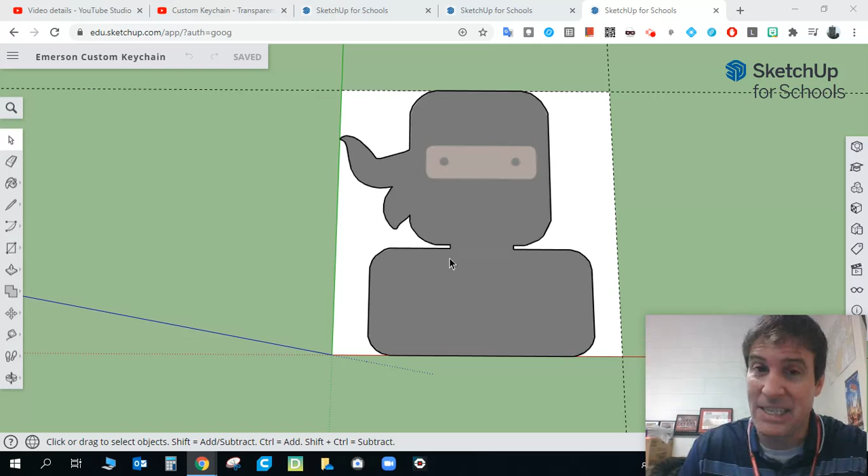So I'm going to show you a little bit here. I'm going to scroll in. This isn't something you need to do, I just want to make sure you see it. So I'm zooming in to show you we've done the push-pull and we're looking at three-dimensional geometry. Because we're looking at three-dimensional geometry, that puts us in a place where we can actually start to talk about and look at and worry about the inside of the object.

So the next step is to do all the outlines of anything internal, all the internal geometry. Now in this 3D print, there's really not a whole lot going on here. Mostly we just got that little eye cut out and then the two eyes.

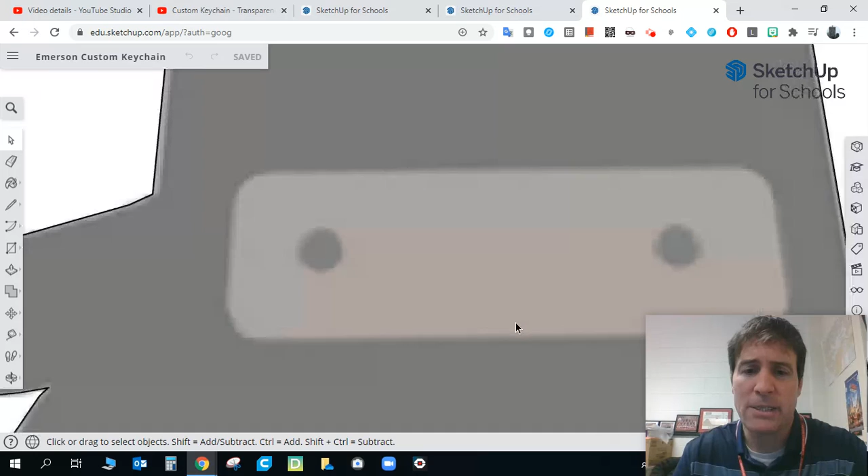So what I'm going to do is exactly what I said. I'm going to get my pencil tool and trace around the outside of all this internal geometry. Again, you can see I'm using my zoom tool to zoom in a little bit, and I'll use the pan tool to move my placement a little bit. Then I'm going to continue tracing around the outside.

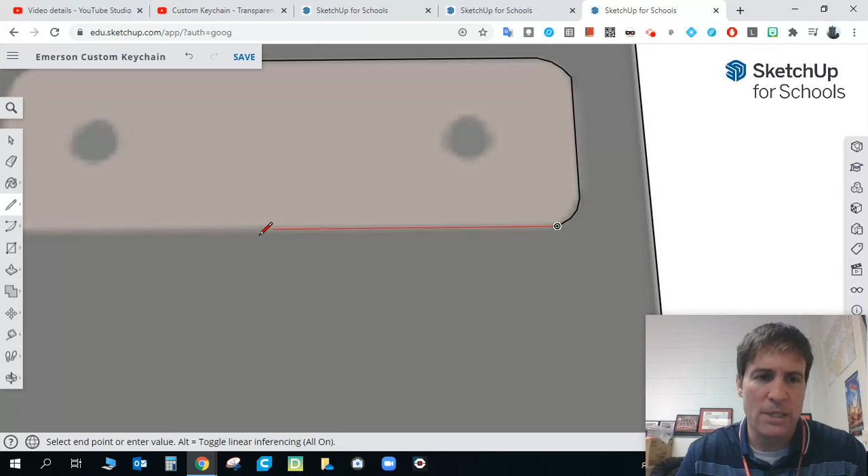So I need to trace all the internal geometry I have in this object—everything I want to appear, everything I want to be part of my final keychain, needs to be traced here in this process. Again, you see I'm getting a blue line. I've got to make sure I avoid that, just adjust my location a little bit, and I'm able to avoid it. So I'm going to do some more tracing here.

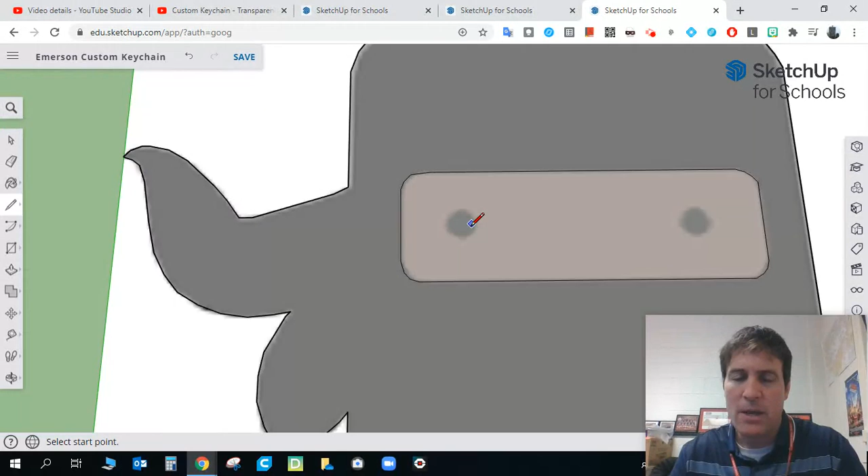I know this is fun watching me trace, but there we go. So now I've got that little eye cut out in his outfit done, and I'm going to go in for the eyes. For me, the eyes are pretty much circular, so I'm going to do my best job. I'm actually going to use the circle tool and try to find the exact center, then get that circle to match up as well as I can. I think that's pretty good.

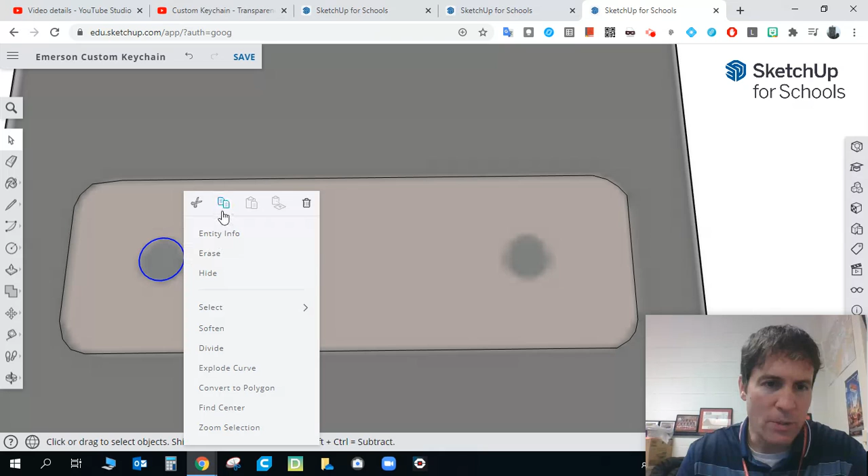Rather than doing that again, this time I'm going to click on this one, copy it, and then paste it over here. You can see it's right there, and I'm going to try to make sure I match it up. You can see I drag that line—I have to move it here to get it matched up as well as I can. Then I'm going to try to get it right there and see if I can match that up again with this guy. Actually, I think I'm in pretty good shape, so there we go.

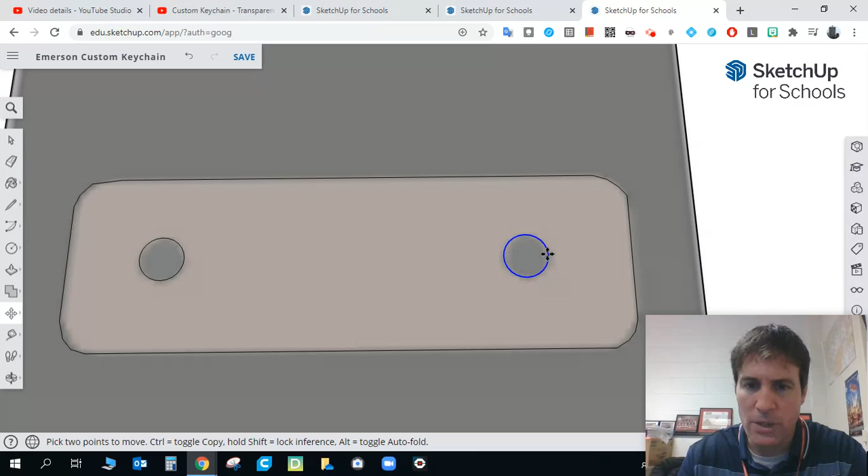So now I've got my two eyes and my eye cut out, and that's really it. I've traced all the internal geometry I want to, and I'm ready to do the next step.

Now there's a couple things I want to point out that are pretty important, so we're going to spend a little more time in this video. If you've already traced all your internal geometry, you're in good shape. We'll talk about that next step in a minute, but here's some things to think about.

In order for a 3D printer to print something, it has to be three-dimensional, right? And this is just a line that we've drawn on the top of the object, so that's not going to do anything. If we want the mouth to show up, then we have to do the same thing we've done for everything else, which is trace around the outside of that mouth, which is going to be considerably more work than just doing what we just did.

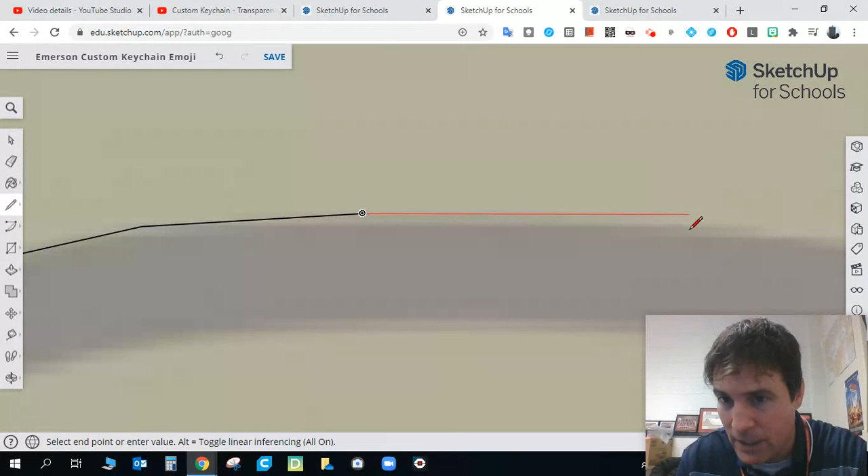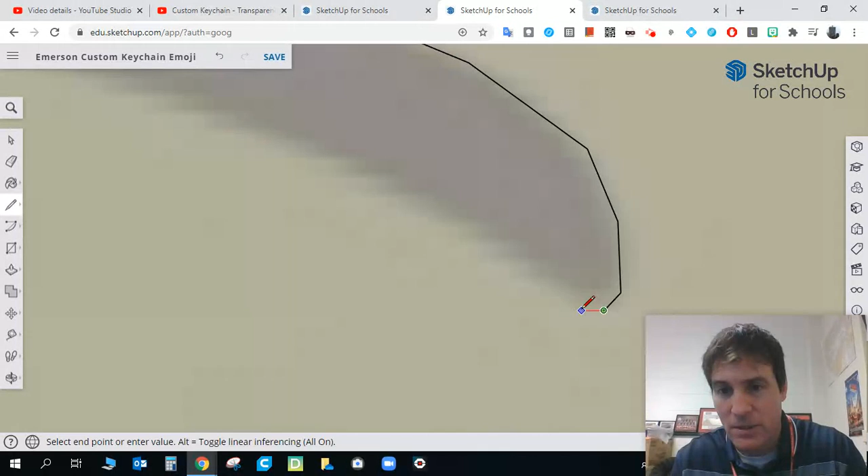In fact, it's making me sweat a little bit, I've got to work to get these lines where I want them to be. This is obviously much more work than just drawing 5 little line segments that made that frowny face line appear. But in order to make this 3D print, that's the issue - it's not that we can't make the shape happen, it's that we want to make it so that this shape can actually 3D print.

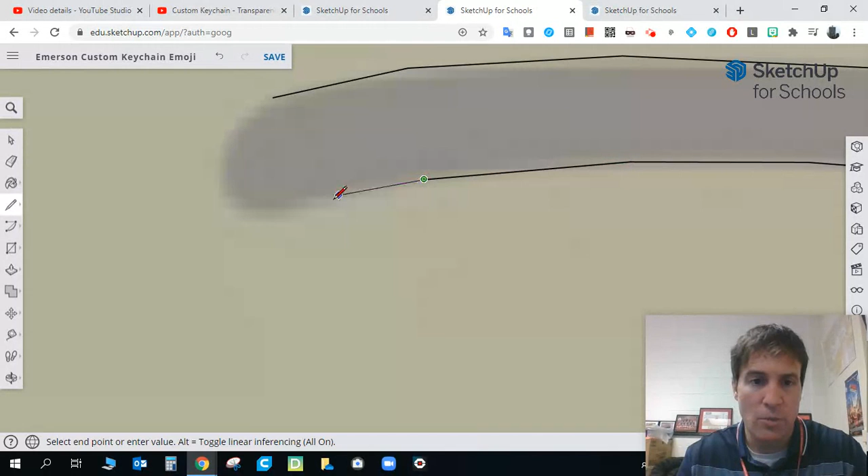In order to make it 3D print, we have to make it into a three-dimensional object, and for it to be a three-dimensional object, it has to be able to be push-pulled. So what I'm doing right now is trying to get to the point where I have basically a closed figure that I can then push-pull into a three-dimensional shape. Again, just trace it around the outside - I'm trying to do this as quickly as possible so you can stop being bothered by my nonsense. But there we go, we've got a closed figure now.

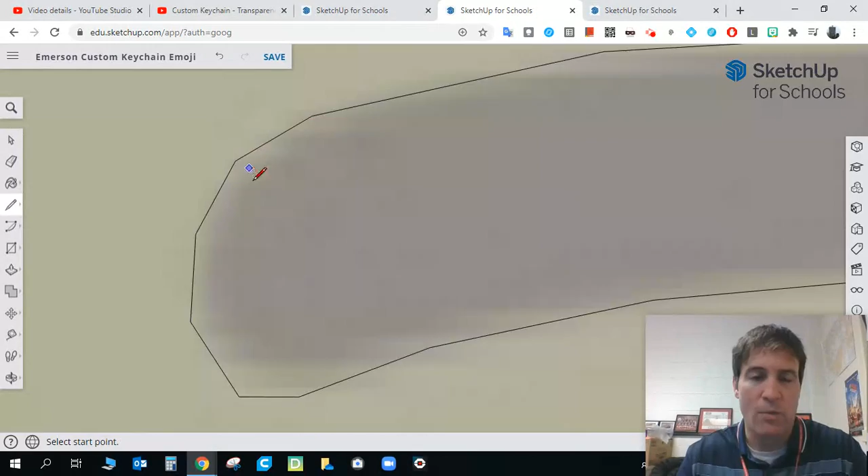If I grab the push-pull tool, you can see now I can actually push-pull that object, which is what this whole exercise was all about - making sure I had a closed figure that I would be able to push-pull. You can see each of these closed regions are closed figures that I can push-pull, which means I can make them three-dimensional, which means they'll 3D print.

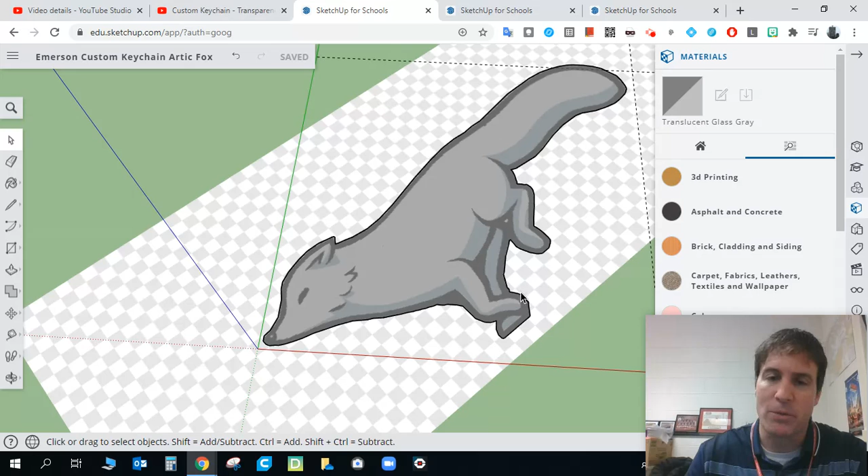I'll show you another example of the same kind of thing. I've seen some people doing some animals. Here's an example - like some kids would do that little separation between tail and, I don't know, rump. They'd try and do a line here. Well, here's the thing - that line actually doesn't do anything unless you make that line three-dimensional.

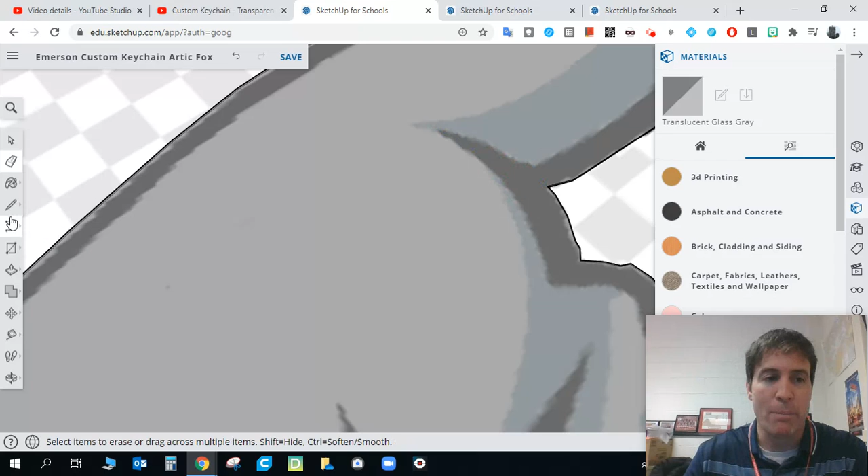So you're going to need to think about whether or not you want to make that separation happen. If you want that separation to happen, then you're going to need to make it a closed figure that you can make three-dimensional, right? So what I'm doing right now is doing just that. Now, oopsies, let me undo that one.

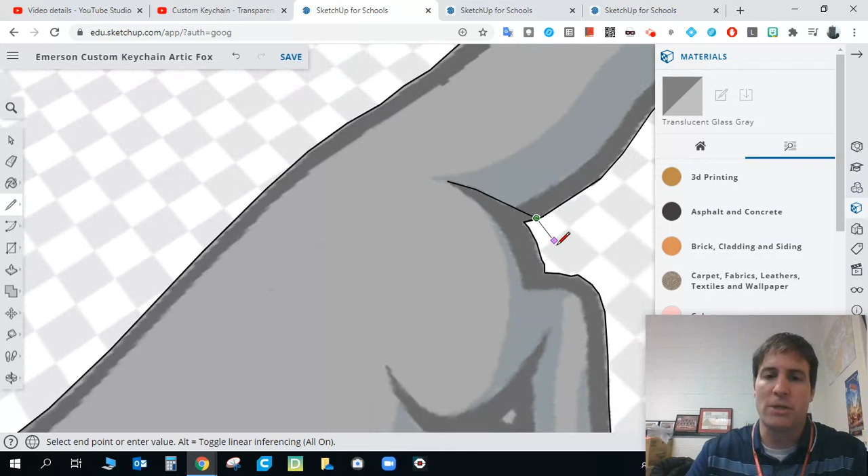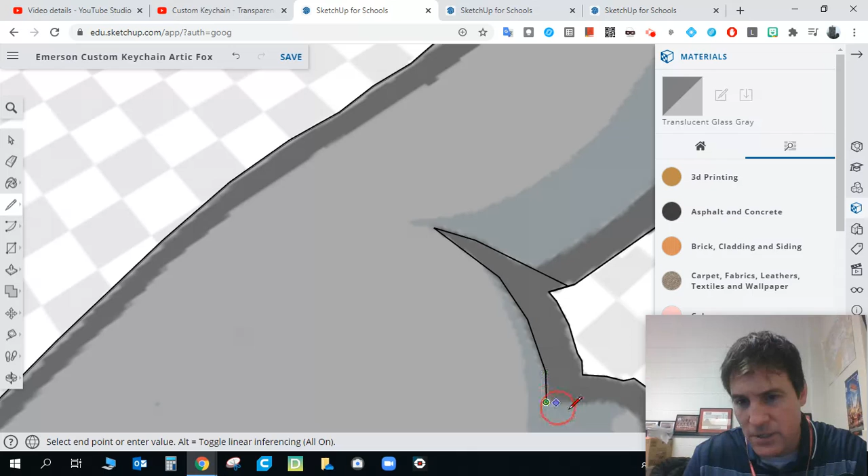Now, at some levels, you may need to eyeball it. So here I'm trying to create that separation, but I want to make sure that I'm still true to the artistic integrity of this original image, right? So I'm doing my best here to do that. And again, we're going to have to kind of figure out where to go in some ways, because if we do all of this, it's going to be a little bit much - we'd basically be push-pulling a shaded region in this particular image.

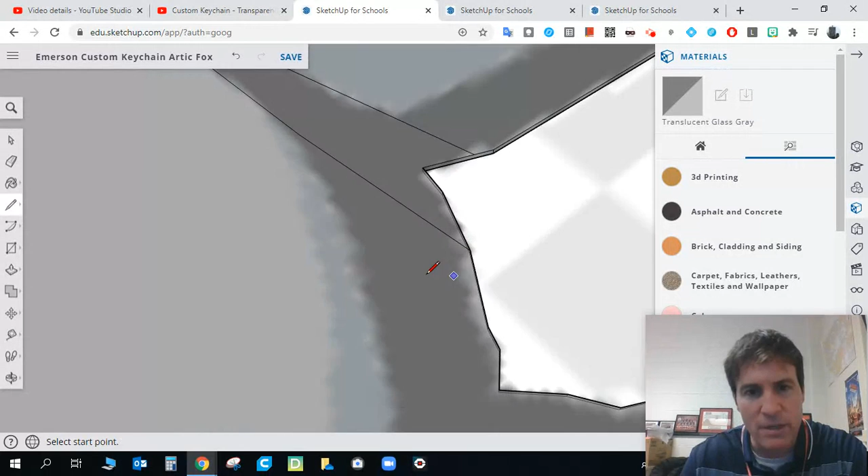So maybe the best thing to do there is not all of this, but rather something that will make it look like this separation, and at the same time not do too much damage to the integrity of the artistic thoughts here. So if we get our push-pull tool, you can see I've got a separate region there - I would be able to push-pull that and make that something.

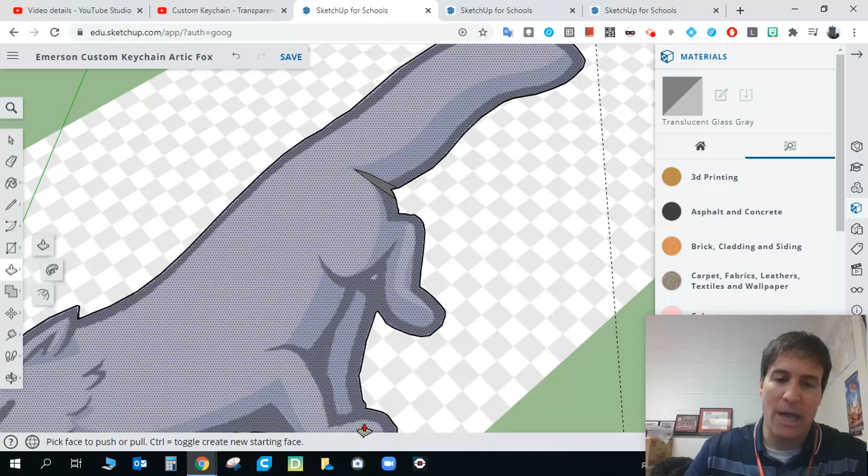Same thing here with the separation between these legs, or the underbody and the legs - you're going to need to make those things three-dimensional or separate regions. So this leg, obviously, we block that off from the rest of the body. We're going to have a separate region, and once we have a separate region, we've got something we can print.

These little delineations between the head and the body, again, in order to make those print, you're going to need to trace around the outside of them and then push-pull them to a different height to make them three-dimensional. We'll talk more about that push-pull part later, but again, in order to make it three-dimensional, we've got to trace around the outside. We can't just make lines.